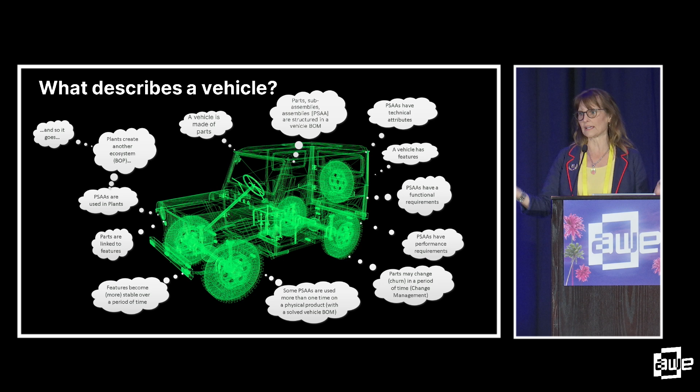So it's definitely a multi-dimensional problem to try to incorporate XR in these environments, because the amount of information and the variance of the information - part of this doesn't even attack the artistry, like the absolutely beautiful design of a vehicle and ergonomics and all of that. This is just one little piece of it.

And so the way it kind of works is that there is a collaboration between all of these different disciplines. And people like to silo. They like to have - they know their discipline. They like to focus on that, focus on this, focus on the other thing.

But the power of XR and an intelligent digital twin is it allows you to go broad and deep. And it allows you to relate to somebody whose view you might not understand otherwise, because you can receive their view personally, connected through XR in a manner that works for you, so you can understand their perspective. And so, okay, I'm gonna go back.

Just note the little colors and bars, because I'm going to take you through a series of before and after examples that represent the way things are now or can be. Automotive is notorious for clay.

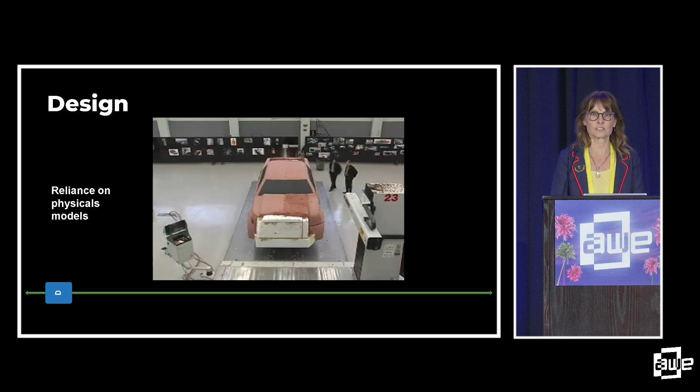Clay is still a very valuable mode of development. There are a lot of good technologies that can do touch feedback, but not to the level of human touch. So clay is still used in automotive, and will be for some time coming.

But it is possible to use XR and receive more input. Instead of looking at clay, which was just for design, now there are ways of getting immersed, telling stories, doing user experience. The picture of the F-150 at a camp scene was like that fire actually crackles, and you can take your camping gear, load it, and see how it fits in your bed and what you can do.

There's the one in the middle that looks beige colored. That's like a 3D drawing, so you can draw around you and understand volumetrically where things are. There's much more information you can get from design—you can get ergo, quality, all of these different things that you couldn't get just from looking at a clay and judging proportion and design.

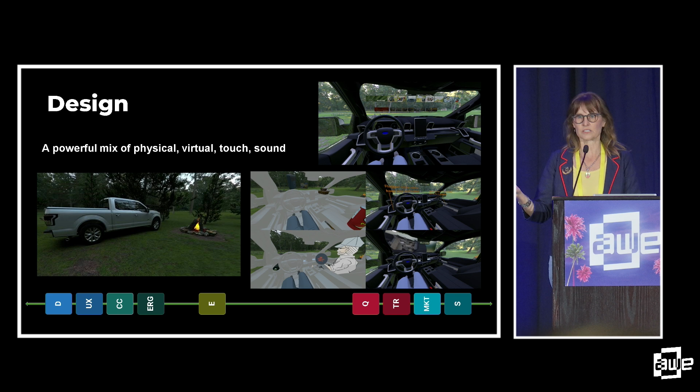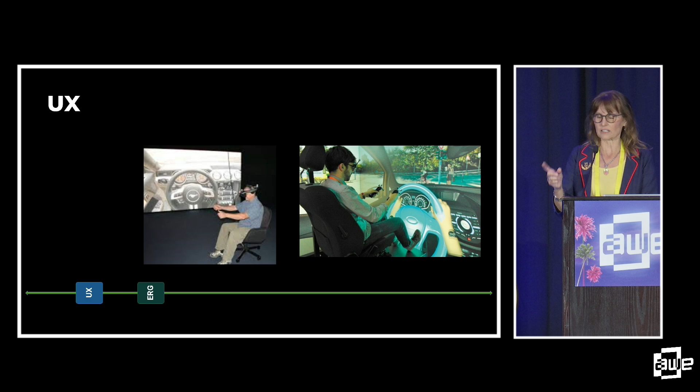For UX, I think this is really interesting, because these are both virtual images, and both technologies—headset and cave—are extremely valuable tools for immersive work, but they're not necessarily good for when you need to touch things. And that reminds me, every technology has a strength—play the strengths and minimize the weaknesses.

This is an example of a chopped up Mustang with 3D printed parts and microcontrollers that can be put in different locations, and then the part changes based on where it gets located in the immersive environment. The steering wheel can be instrumented, and you can touch it and get your personal connection to the vehicle, but then you're looking at a beautiful vehicle instead of this chopped up thing with only one seat. That's a very powerful tool.

This is one of my favorites, because there used to be an actual windshield there, and somebody would crawl up, sit in that car seat, and look at glare—seriously. Instead of that, you can do real-time ray tracing in an immersive environment, and check out the way light propagates in the scene, and how you can actually see the cluster reflected in the side glass from the ray tracing.

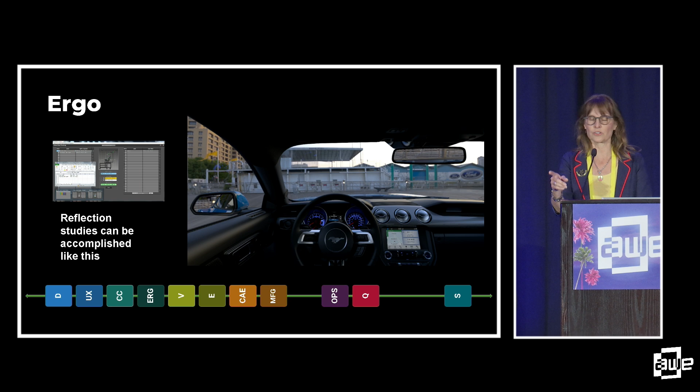This is in a VR environment, and the ray tracing is real time, so it responds to your movements. You can change time of day, measure things, and understand perspectives from different eye points. So this is perceived quality.

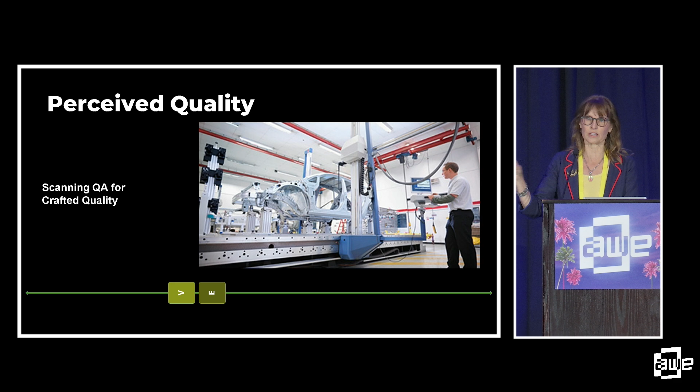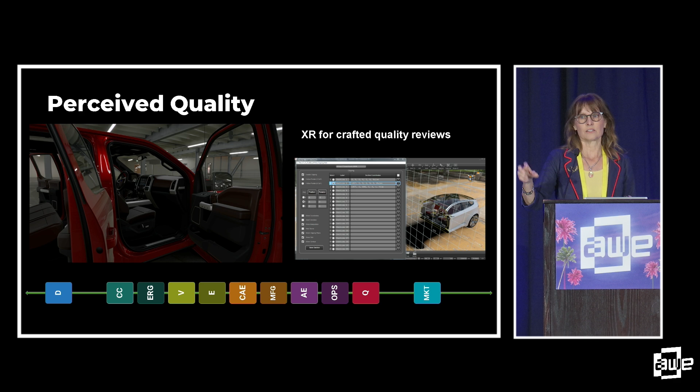These are still being built—this is basically scanning a part and then seeing if all the locators are in the right spot. But instead of that, you can create the sections, and instead of scanning, you can use math data—which we don't talk about enough for XR—actually using not tessellated data but NURBS data, surfaces based on math, and being able to cut through those sections and see what things look like, and whether they're meeting proper tolerance and all of those good things.

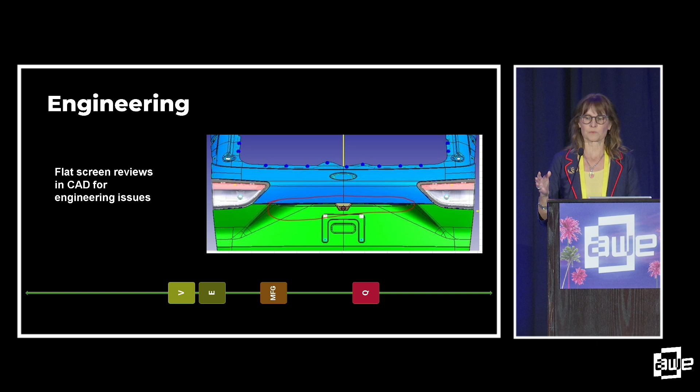For engineering, CAD is king, especially in automotive, and there are many reviews done with parts that look like this. But this is an entire vehicle with everything, and it can be done in an immersive environment with real-time ray tracing. The technology exists to make beautiful vehicles like this that are in real time, that have ray tracing, that have an engine and a transmission and the whole powertrain, and have engineering integrity and look amazing.

You can see how many different functions at the bottom work along with that, because that really opens up very many disciplines in those verticals to understanding the power of where this is in product development, and how XR can help with understanding, because looking at this on a flat screen is nothing like getting immersed in it.

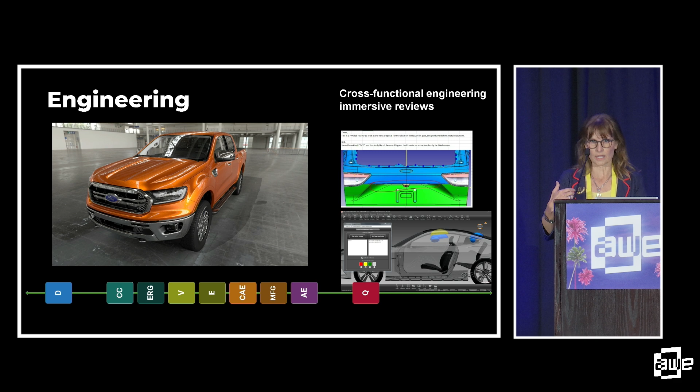And you do understand much more about the proportion when you're walking around the vehicle, looking down and over, getting in, seeing the glare - all of those things. And so this is just a live, MRI kind of sectioning capability.

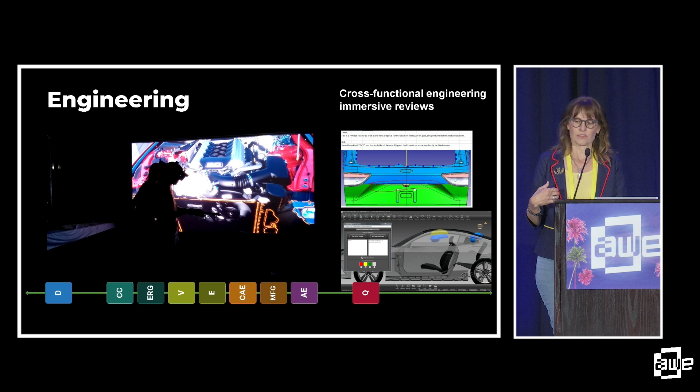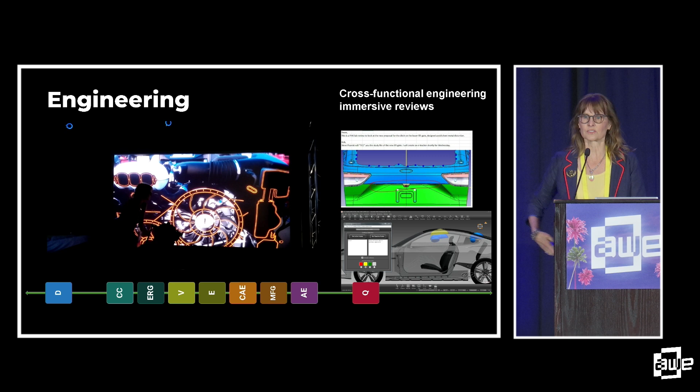And this is just another engineering application. You can see this really goes along with the other slide - there are so many things you can do where engineering is represented in the context of the design. And in manufacturing, there are so many use cases.

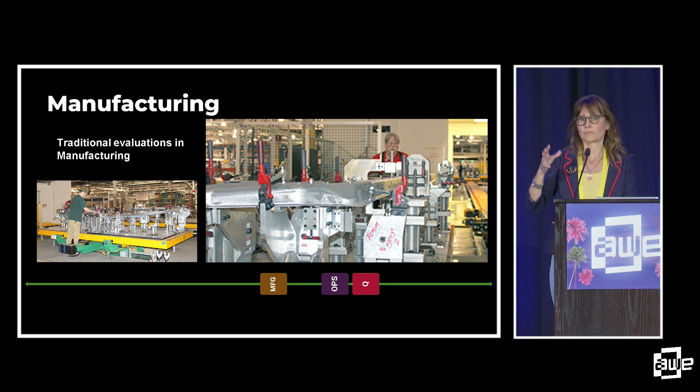Evaluations are still being done like this. This is a recent thing - I just looked, like 2 weeks ago, to make sure this is still being done. There's still a company that does these things. This is basically simulating a line and then understanding the line after the fact, measuring and scanning and making sure you're meeting tolerance. But you can do this.

So some of these studies you can use a prop and then use the tools that they do to put the transmission in the vehicle, create that environment, and then do that simulation. In this case, the person is mocapped up, and their body posture while doing that is scanned and then saved and applied to a digital human, to understand if the body can do that repetitive motion without injury over a long period of time, and what extent of the population can do that based on that digital human.

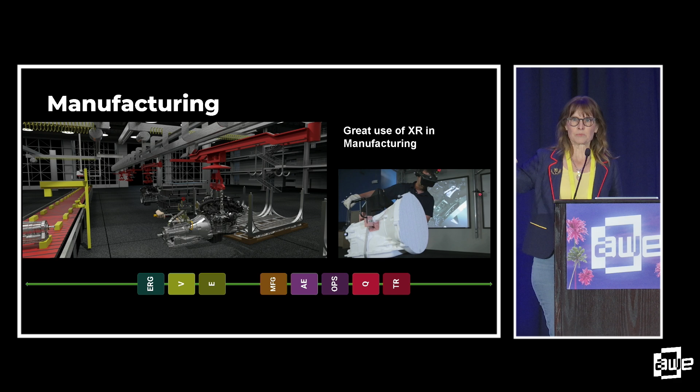So this is another manufacturing process, and process variation really comes in. That thing on your left is actually a vehicle where they move little dials, and then the parts move apart and they measure it - and that thing is super expensive, it's insane. The other one, those plates move, and they look at the variation between the components.

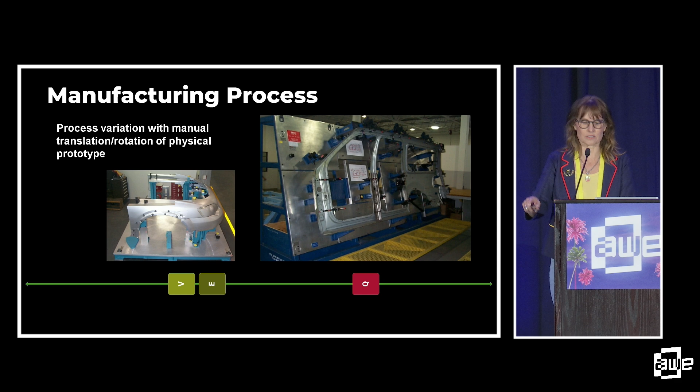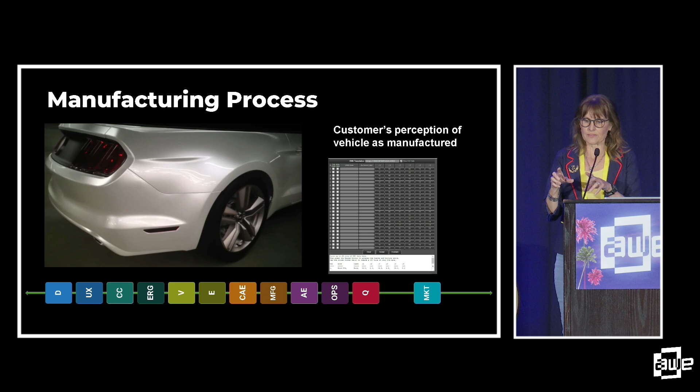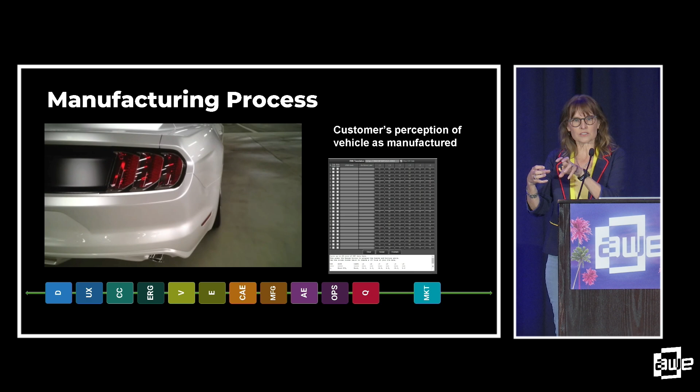But this is a patent that I have with a few other friends at Ford. If you notice, this is the entire manufacturing process applied to the design before any line is built, considering all kinds of sigma of variation, and then morphing the geometry and showing it to us. So these are a select set of worst cases so you can kind of see it in the video, but you see how it's crumpling, warping, and moving.

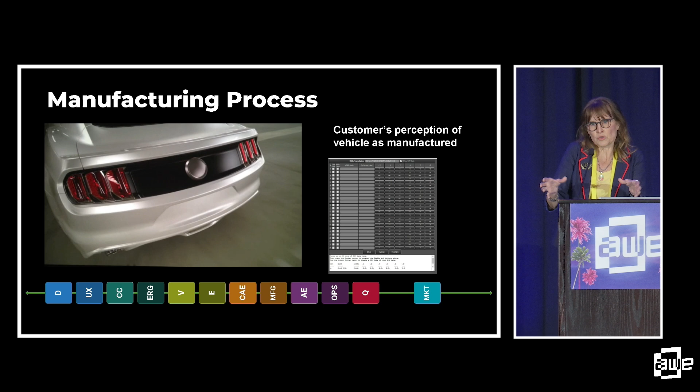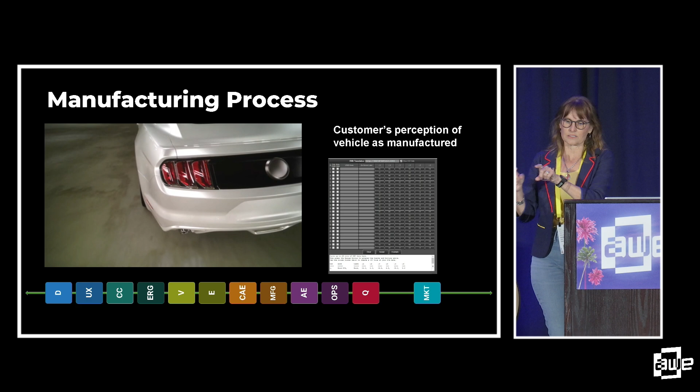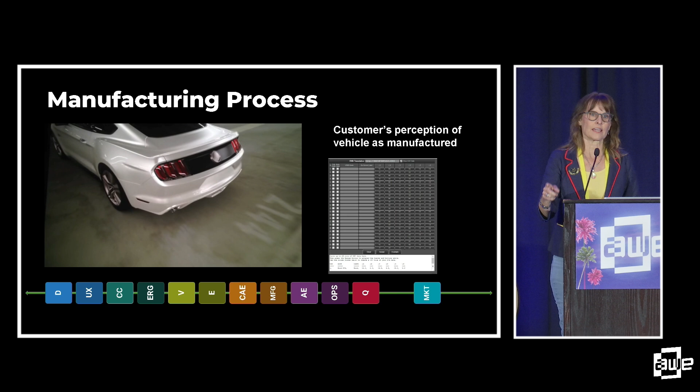Those happen because the locators, after a period of time, cannot bolt properly - the fender or the bumper can't bolt properly, and so it twists and moves, and those conditions can be represented. One of the things that's very important is that bringing that data in means you have respected the hierarchy and the way the product is defined in the organization. This can't happen unless the product hierarchy is maintained.

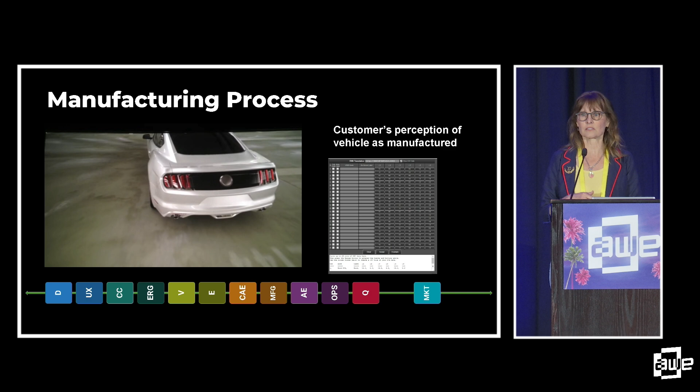So somebody could come into one of these immersive reviews 5 minutes ahead of the meeting and say, here's my manufacturing process, and we can dump it into the environment, and then this interface comes up, and they can see all of their data and pick which conditions they want and just look at things. And that's the secret sauce - that's the hard work that I think isn't talked about enough, but it's extremely critical.

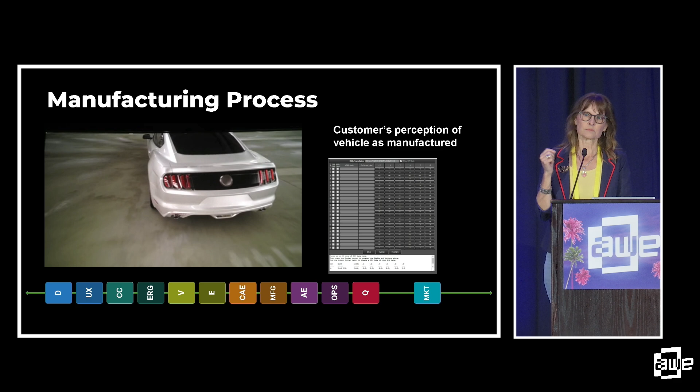Now, creating those surfaces does need some love - it just doesn't happen in 5 minutes before a meeting. But the actual tolerances, checking out things like AV gaps and gaps that can result in some twist, those can all be seen without any pre-work if you maintain a relationship to the product structure in the way you're designing and engineering your product.

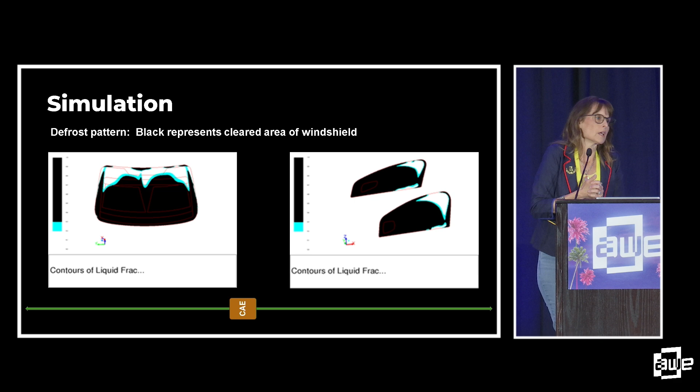And so here's a simulation example - this is a computer-aided engineering study of a defrost pattern. I'm from Michigan, so it's cold, and when you get in your vehicle and have to wait for the windshield to defrost, what is the optimum pattern so that you wait less time, more people can see out, and you can get going safely?

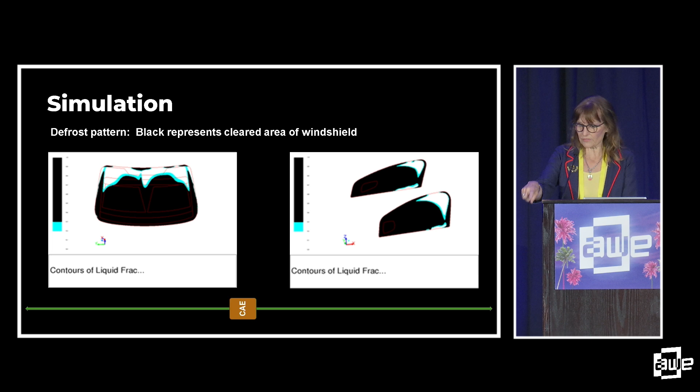So that's the problem. Those are defrost patterns, and this is what the engineers would get—these images, and they would have a slider, and they could watch the defrost pattern on the slider. But I think this is a much better way.

You get immersed in the environment, and you can represent the analytical with the rainbow of defrost, and you can also represent what the customer experiences by putting frost shaders on all of those windows, then watching the defrost pattern happen, changing the viewpoint of different people, and seeing who can see what and when, at what time can they go safely. That's what XR enables.

It's not nearly as good on this flat screen as it is when you're inside that environment. This is a perfect application for a cave because you get a really nice, wide field of view, and you feel surrounded by it, and your whole goal is to look. But any kind of immersive environment is an advantage over just looking at it on a flat screen or the way you saw before. You can see how many different functions that opens up.

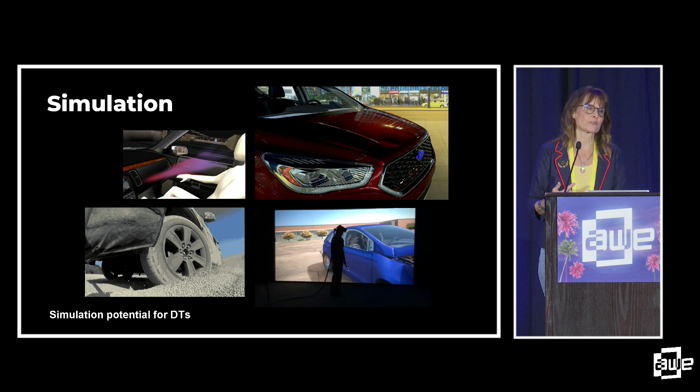When somebody came to me and said they wanted to do this, I was like, yeah, okay. I'm not an expert in all of those disciplines, but it really taught me to listen and respect the way they think, and apply things that work for them, not things I think they should have just because I think they should work that way. That's a critical mindset—at least it was for me—for the successful deployment of some of these technologies.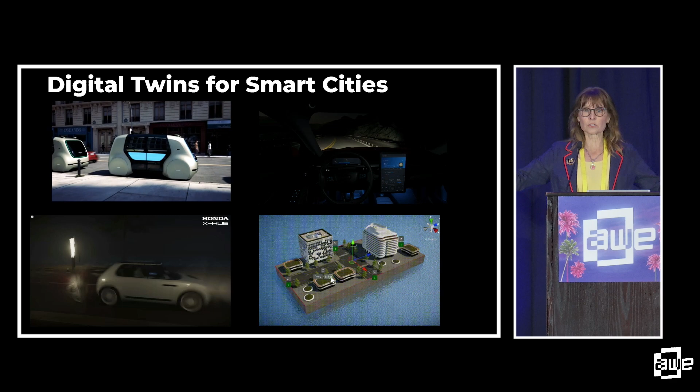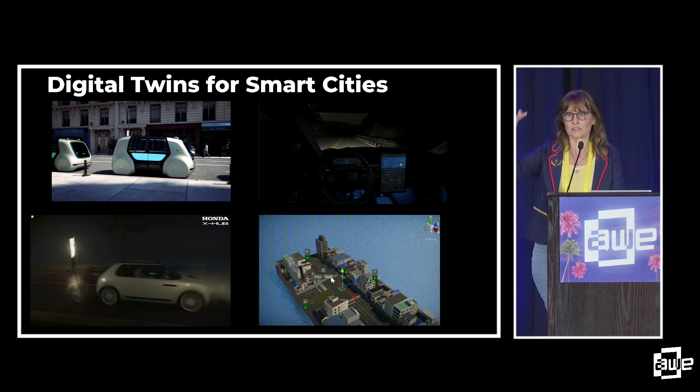Smart cities is another thing for digital twins and XR—having a view inside, understanding vehicle-to-vehicle communications, being in an environment and able to do some storytelling, building worlds, and then having the world respond around you. There is so much to do in the immersive space with smart cities and digital twins, experiencing them either from the overlord view or the personal connection, enjoying an experience.

Okay, and then this is very important—there's so much that can be done.

There's new manufacturing technologies that are coming out, and the industrial Internet of Things tied in with the intelligent digital twin experience through XR is an amazing enabler that's just fantastic.

I want to leave with this thought, which is we're not there yet. And this is just my swag, I'm guessing, I don't have good data that these are all true, but it is true that we're not at 100% utilization of intelligent digital twins, and we're definitely not at 100% utilization of using XR in these spaces.

So the call to action for everybody is to attack all of these things that we need to do in a way that chips away at the problems that we have. We've come so far. It's not consistent among different companies. It's also not consistent among different people, like their culture in the different companies.

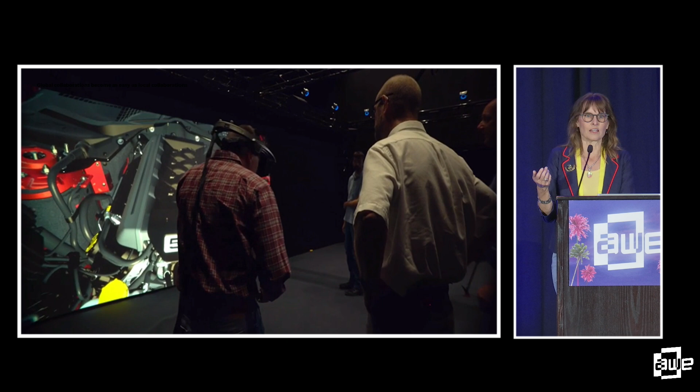And when that happens, I would actually go in and take some pictures. This room would be, it's a room where a life-size virtual vehicle can be there, and then they can understand different perspectives. I just think it's an interesting dynamic.

So what happens when all this works is you have this collaboration where everybody is sharing, and it becomes more of a web and less of a silo. The value is that it propagates information amongst these cross-functional teams, and the value is a ripple effect throughout organizations.